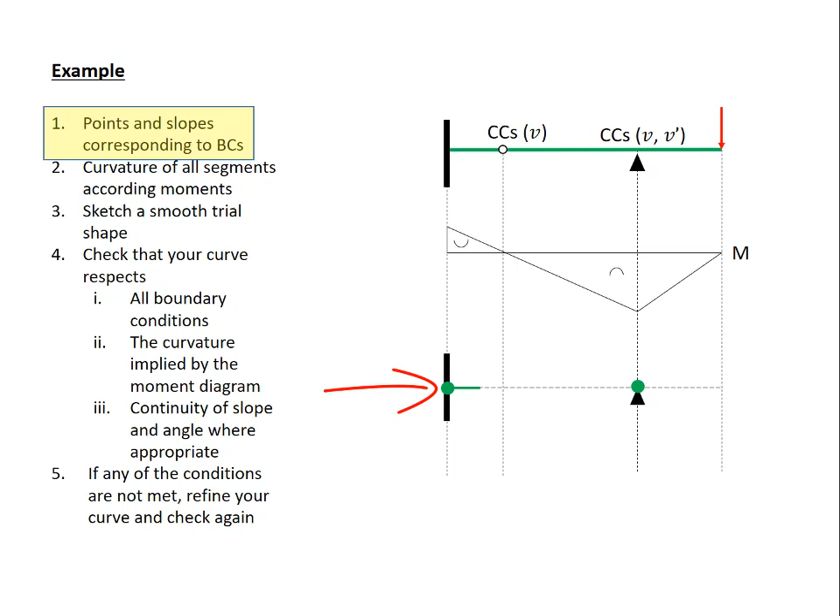Step 1. Draw in points and slopes corresponding to the boundary conditions. I've drawn in a point at the fixed end and a point at the pin to represent the fact that those supports prevent vertical displacement. I've also drawn in a line segment at the fixed end to represent that the fixed end also restrains rotation.

Step 2. We look at the curvature that's implied by the moment diagram, and we see that there are two segments of curvature. To the left of the hinge, the beam will be concave up. To the right of the hinge, it will be concave down.

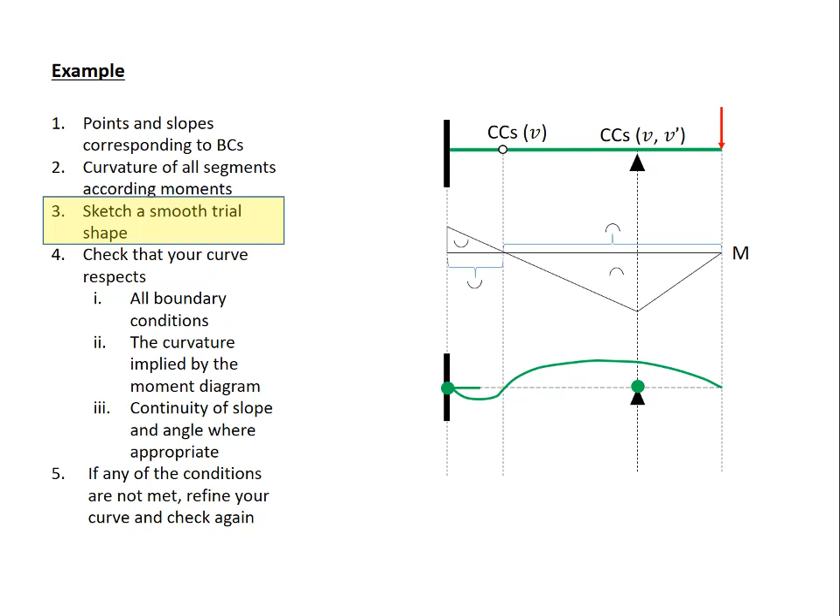Step 3. Sketch a smooth trial shape. The shape that I've sketched here is probably the most common trial shape that I've seen when students are first learning this. It just feels right. You draw something that's concave up, you draw something that's concave down, and you make it go through points that are there on your construction lines. Now this is wrong, and we'll see why in the next step when we check.

Step 4, checking the curve. Let's look at the boundary conditions. We satisfy the boundary condition for displacement at the fixed end, but we don't satisfy the boundary conditions for rotation at the fixed end, nor for displacement at the pin. So that condition is not satisfied. Let's look at the curvature. Concave up over the left segment, concave down over the right segment, and that indeed matches the shape of the beam that we've sketched. So that condition is satisfied.

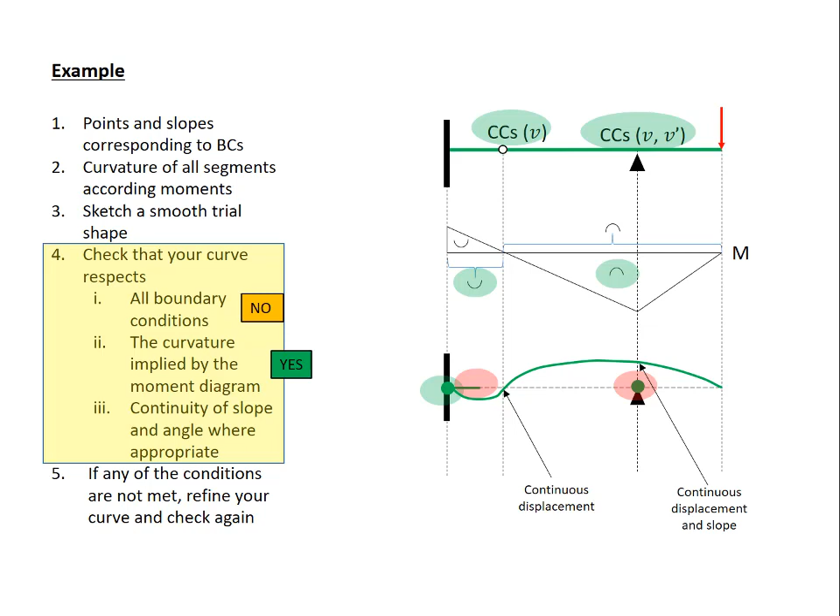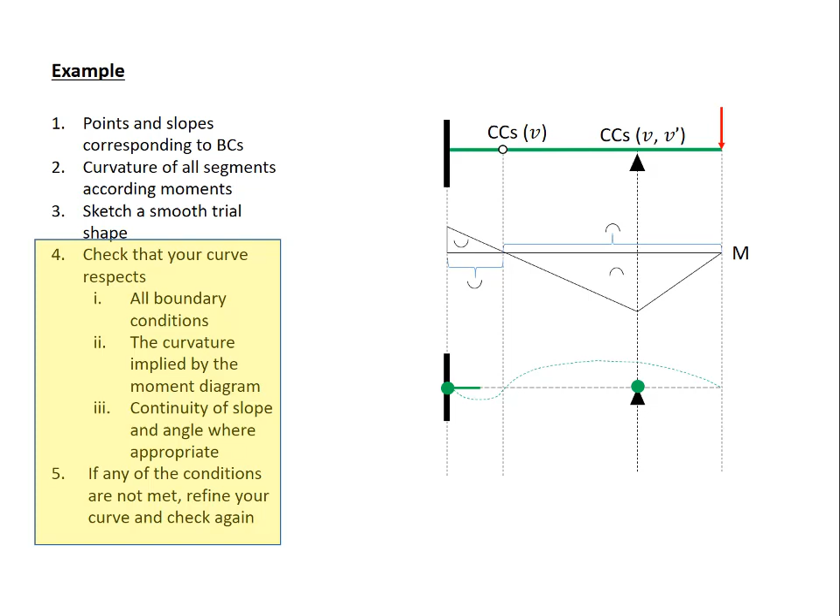Let's look at continuity. Well, we previously identified the continuity conditions. If we look at the hinge, we indeed see that there's continuous displacement. If we look at the pin, we do see that there's continuous displacement and slope. So we have satisfied these conditions. We didn't satisfy all our conditions, so we're going to go back and we're going to refine the curve and check again. Here, I'm showing the previous attempt in a thin dashed line, and let's try to modify what we've drawn to satisfy all the conditions.

We'll fix the rotation boundary condition. So we know that we not only have to start at that point, but we have to start with a horizontal slope. And the only way that we can start at a point and a horizontal slope and have upward curvature is indicated by the curve there.

Next step, I'll draw in the hinge, and I'll draw in what's called the chord. The chord corresponds to the rigid body rotation of that segment of beam, and it's drawn in there simply as a reference line. Well, keep in mind that at the hinge, it's okay to have a slope mismatch. There's no continuity condition on slope or on rotation.

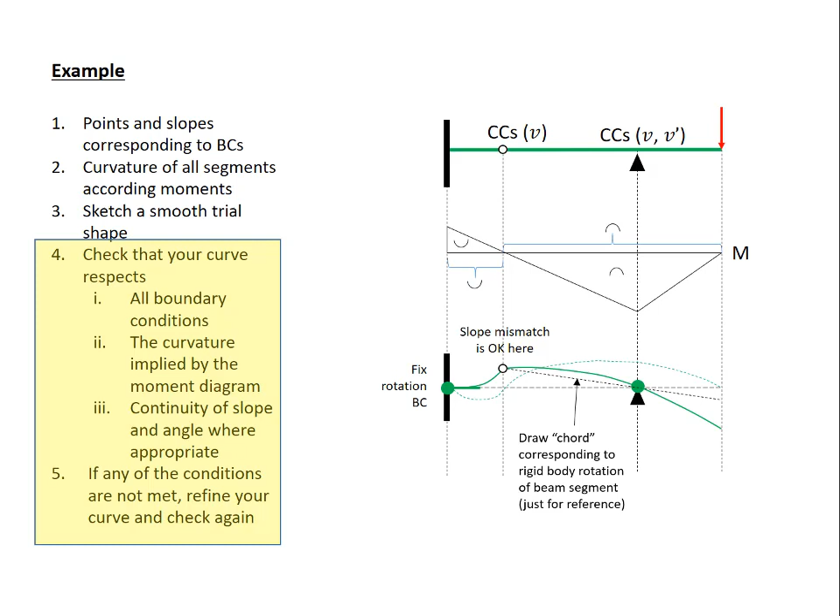And we'll use that when we sketch in the other segment of curve, which has to go through the hinge because there's continuity of displacement, and it has to go through the pin, and it has to be concave down everywhere. If we use all those three pieces of information, we get the curve that's sketched there. Let's drop out all the construction lines and let's evaluate this new curve.

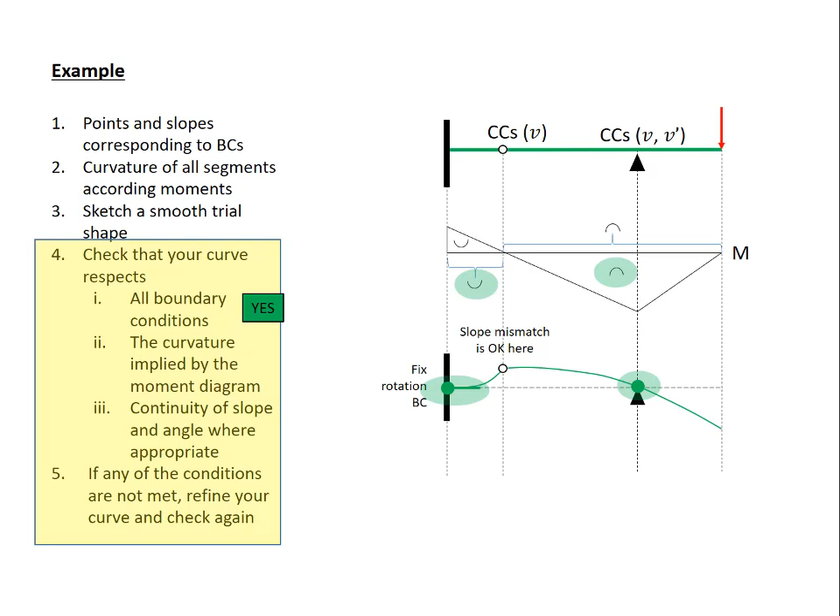Boundary conditions, fixed displacement and rotation at the fixed end, fixed displacement at the pin, we're good there. Curvature implied by the moment diagram, concave up over that left-hand cantilevered segment, concave down over the rest of the beam, we satisfy that as well.

Continuity of slope and angle where appropriate. We see that there's continuous displacement at the hinge and there's continuous displacement and slope at the pin. So we've satisfied that condition as well. Now we've satisfied all our conditions, we're comfortable with our answer, and we're finished.